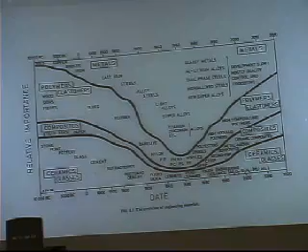Okay. Back here, when people were using wood and skins and fibers and stone, it turns out they actually did have an energy crisis. I'm sure they had several energy crises over the years, but the one I'm thinking of occurred about the mid-16th century in England. And it turns out the crisis started out with two industries.

One was people were starting to make iron, and in order to make iron, they needed a hotter source of carbon, or of fuel, than just wood, so they would burn down the trees and they would make charcoal. Everybody knows how to make charcoal.

You cut down the trees and you stack them up, and then you pile dirt over them, and you put a little hole in this mound of dirt, and you control the amount of oxygen that gets in there, and you essentially ignite it. But in a reduced oxygen environment, the whole thing heats up, and you have a hole at the top, and you basically burn off all the lignin and other stuff in the wood, and you end up with charcoal.

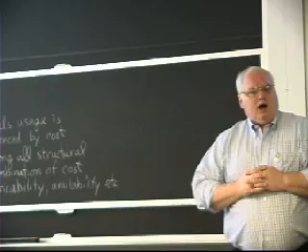And you need charcoal in order to get a hotter fire, because when you have wood, the vapors coming off, all the lignin and these other things, actually cool the fire down to a certain extent. But carbon burns hotter, and so they wanted charcoal. And they were using a lot of wood to make charcoal because iron was coming into greater prominence.

And then another thing was national security. People were building ships. They needed wood to build ships back then. And so it turns out that, as the iron industry grew, this is basically a history of metallurgy called Out of the Fiery Furnace. It's a PBS series. The forests of Britain had long been admired for their most celebrated inhabitants, slow-growing and long-lived. These were the mighty oaks.

And it talks about the iron industry growing, and then the ships. Nelson's flagship at the Battle of Trafalgar took 2,100 tons of oak, thousands of trees, a whole forest, in order to build a ship like the Victory. So the two uses of oak were in conflict. In 1558, a law was passed forbidding the felling of trees to make coals for the burning of iron.

But of course, the government exempted the areas that were important, typical government bureaucracy. You're not allowed to do it except where it's economically viable. And it says perhaps because of the lobbying by the iron industry. In 1559, a writer complained that the price had risen from a penny to 2 shillings. Does anyone know what that ratio is? I don't remember the old British system. I think it's a factor of 14 or something. By reason of the iron mills.

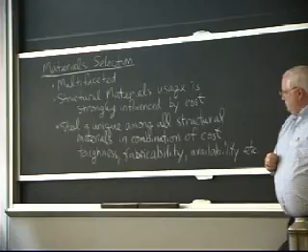And steel is unique among all structural materials in the combination of a number of these: strength, toughness, cost, fabricability, availability, the number of elements in the Earth's crust. The only thing that was above it was aluminum. And we'll start talking a little bit about aluminum today. We started to talk at the very end about the cost of material, or the application.

I didn't tell you that because of this $200 a pound cost over the life of the vehicle, some commercial airlines require that a vice president sign off on anything that goes into the commercial airplanes. You know, like how many magazines you're allowed to carry on board.

Think about it, you've got 50 pounds of magazines. That just cost the company $10,000 over the life of the aircraft at $200 a pound. So you don't always stop to think about it, but I think about it every time I see magazines on the aircraft. I think, whoa.

Anyway, we talked about the X-33 space plane, which was supposed to replace the space shuttle. I think in other parts of the video, when I talk about adhesive bonding, I'll talk about this, but it was towards the end of the day, and I didn't pass this around.

This is a graphite epoxy composite skin and a Nomex or Kevlar honeycomb, and you've got a foam composite between these two sheets, and you've got sheet adhesive in between here.

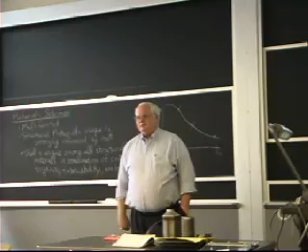Stupidity by objective. Yes? I don't know that there was anything other than some guy decided that's how long it's going to be. Maybe it had to do with congressional appropriation timescales or something, I don't know.

Okay, so that's the X33. It turns out steel is not wonderful for everything. As you go faster and faster, you'd like to have something that's less and less dense. However, sometimes we forget that if something doesn't move, you don't really care about what it weighs, you care about what it costs. However, if it does move, you do care about what it weighs, because the heavier it is, the more energy it takes to move it. And the faster it moves, the more you're willing to pay to get lightweight.

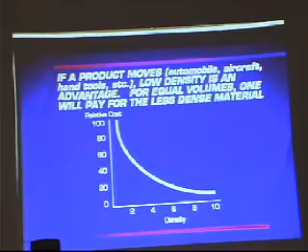So if I went back to that cost of $200 average savings on a commercial airplane, if you look at military aircraft, it turns out they figure about $1,000 a pound, and that's on the average structure. If you actually start talking about the rotor disc, which is spinning at 10,000 RPM, you're willing to pay tens of thousands of dollars to get rid of a pound, because a pound saved there might result in 5 pounds saved on the wing. So if you move faster, with more payload and/or further distance, people will pay a lot.

I remember when, almost 20 years ago, 15 years ago now, I had just come back from Japan, 2 weeks in Japan, and I got a call from Engelhard Company. Engelhard was making catalytic converters — these are catalytic converters, I passed them around last time — for 747s. They were coming out with the 747-400 at Boeing, and this was going to be the long distance 747-400.

In order to take weight out, they didn't want to make... did you know there were a couple of catalytic converters on the 747? It's not for the engines, it's for the air you breathe, because there's ozone up there, and you would get a headache if you were breathing the ozone. So they have to take the air up there and put it through a catalytic converter to get rid of the ozone, so you won't get a headache and you'll meet EPA regs for air quality up there. All the piping had been made in the earlier 747 out of stainless steel. They were now making it out of titanium, and they didn't know how to weld it.

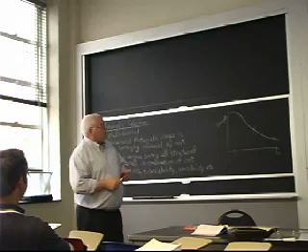Now, in a little more expanded scale in that paper we handed out yesterday, it turns out most material scientists will tell you how wonderful the material is and how the cost of the material is such an important part of the whole thing. Turns out it's not. And that's why this is a welding joining fabrication course. Because the cost of the material, typically for most manufactured products we're interested in, is only about 10% of the total cost of the product you're going to sell.

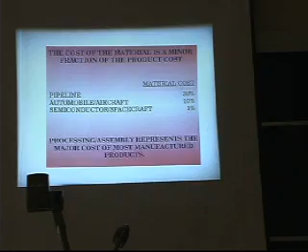You got about 10% of your cost will be design, about 10% will be materials, about 10 or 20% will be fabrication, about 10 or 20% will be non-destructive evaluation of the material, testing, quality control. Hopefully you got 10% profit. Anyway, the numbers are in a little table. The expanded numbers are in a little table that I put together in there.

The one application that I know uses more material as a fraction of the final completed product than anything else is pipeline. And the cost of the pipe is about 30% of the cost of the pipeline. Although you could argue that I should have started with the cost of the plate rather than the cost of the pipe, in which case that number would come down a lot closer to 10%. Okay? Because the pipe costs close to 3 times as much as the steel plate. One of the reasons is because when you ship pipe, you're shipping air. So it costs a lot more to transport pipe aside from just the manufacturing cost.

And in fact, I learned a number of years ago, it actually ended up becoming an LFM project. It started out as a consulting project, but we ended up selling this company, Reading Tube. It's a copper tube extrusion plant. It had a couple of LFM theses done there. And it turns out the United States still has 5 producers of copper pipe.

And the reason is, copper pipe's not like steel. Steel, they load on ships and they transport it around the world. Copper is more valuable than steel, so you'd say, well, gee, how come it's not traded as a commodity? Well, it turns out copper pipe has got a lot of air. And so you can't transport it as efficiently as you can big blocks and big plates and sheets of steel that are all rolled up. Pipe, by its nature, is 80–90% air. And it turns out the transportation costs are the things that control that selection of material.

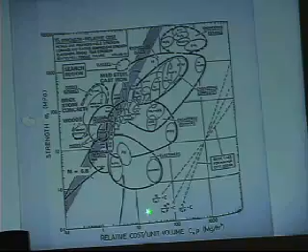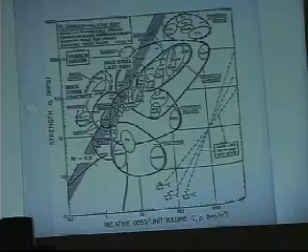Let's take a little bit more time looking at Ashby's types of plots. If you're taking a very high-level view, these are very, very useful plots. Ashby actually goes through some engineering mechanics formulas and says these are guidelines for minimum cost design, and he says basically strength divided by density, but the strength in some cases should be to the 1/2 power or the 1/3 power depending on the shape, the geometry, or the application. And he goes through whether you're using them in sheets or in a bulk material or whatever.

And so you can kind of overlay on this thing. You can look at different regions depending on these slopes when comparing materials. For example, if you're on this steepest line, something here, silicon carbide, you come down that line and say, well, silicones may not have the strength, but on a relative cost, they have the same quality, or actually attribute, J or whatever Professor Clark calls it.

Yes, so ceramics are the hardest, strongest materials, but they're brittle. Metals are used widely in structural materials because they're not brittle, which is another dimension, toughness, which isn't on here. But they have high strength at a fair cost compared to these things. However, if you look at these lines, there's a lot of trade-offs on all these materials. We use plastics for structural materials. This is cost per unit volume, so the plastics have done a little better because they're light, even though they're weaker on an absolute scale. For a structural material, you usually are looking at cost per unit volume.

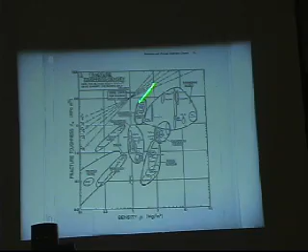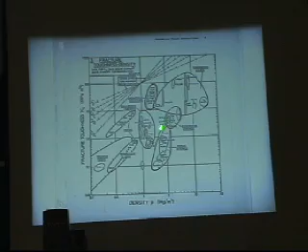I did find my toughness plot, which I got the wrong one yesterday. There's lots of different criteria on these slopes over here. The engineering alloys, these are the metals. Is that tungsten alloy? Anyway, tungsten carbide, cobalt, aluminum alloys, titanium alloys, cast irons. Down here, your polymer foams are very, very light, but don't have such great toughness. But if you're talking about ultimate toughness, the engineering alloys, the metals, are way out here, way above anything else. Metals have ductility; they stretch before they break.

And it turns out people can come in and talk about other wonderful things, but they just can't compare. And this is the one I put up before. This is modulus, stiffness. Sometimes stiffness becomes the criteria.

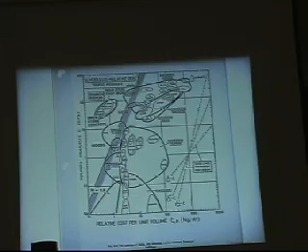For example, as you're doing microsurgery. When I was younger than you, I tore the cartilage in my knee. And at that time, to fix the cartilage in your knee, which I never had done, it was like 6 months on crutches afterwards because they had to lay open your whole knee. Nowadays, they just put a little slit in there and they go in with these little micro tools and fiber optics and stuff, and little rongeurs that can eat out the cartilage and flow it out of there.

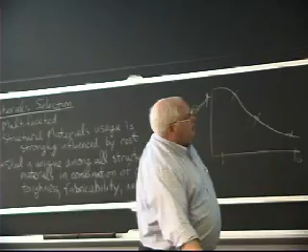But it turns out as you do that, you get slenderer and slenderer instruments, and they get a little too flexible. I actually used to work with a division of Johnson & Johnson, and they wanted to know: our instruments, we can design them smaller, but they're too flimsy for this application. What do we do? Well, they were already using steel, and it turns out steel has got about a 30 million modulus. It's right up in here somewhere. Can't read it on this thing.

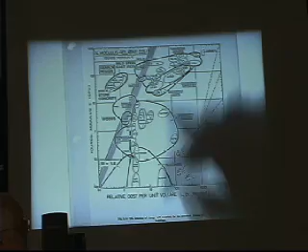Steels. Okay, there's steels right there. It's way up near the top. It has relatively low cost, but it's right up near the top. There's not a whole lot of things above it. Aluminum oxide, silicon carbide, diamond, molybdenum alloys. It says tungsten alloys right there, but molybdenum's up there a little bit above it too. There's very few things that have a higher Young's modulus, which is what you need for a bending beam.

However, I did recommend to them that they consider using sapphire, which is single crystal aluminum oxide, because you could add dopants to it, things like chromium, and you can make it red, so it can be color-coded. Physicians like color-coded instruments. It has excellent corrosion resistance. And it turns out single crystal sapphire is now down around a few bucks a pound.

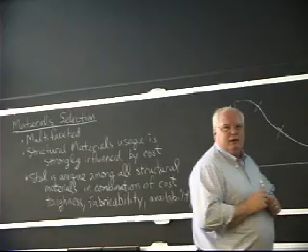Now, it's a little hard to machine, because it's second hardest to diamond. You can only machine it with diamond tools. But I actually thought we could design little cutting tools, and they're hard, but they never liked that idea. But it is stiff. You could have designed smaller tools.

And if you did add chromium, the sapphire is no longer sapphire, it's something called ruby. And can you imagine going to an MD and selling him: you can either buy the sapphire instrument or the ruby instrument. And MDs, they buy anything. Anyway.

Specific strength. If we start looking at strength divided by density, it turns out aluminum is better than steel. That's one of the reasons for using it in many applications. If you think of an aircraft, it's made out of aluminum. There's a good reason for it. It's got better specific strength. You can afford to pay more than $2 a pound for the aircraft.

Simple composites, and I mean things like fiberglass. I'm not talking some aerospace composite. Let's just say simple composites. Plastics really kind of bite the dust. They're not very good on strength-to-weight ratio. They are good when you really don't need a lot of strength. They're great. And wood is not as good as some of these other things. So there's lots of different criteria you can use, and you have to figure out which one for which specific application.

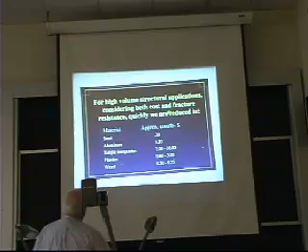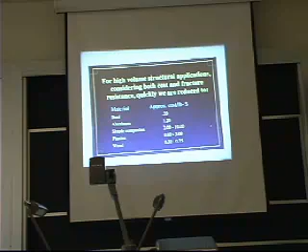Anyway, if you consider high volume applications, you got to worry about cost. And here is strength to weight, so approximate cost per pound per dollar. So steel has a 6-fold advantage over aluminum. So if I'm building a bridge that doesn't move, steel. Okay? If I'm building an aircraft, hey, I can afford aluminum because it's $200 a pound and $1.20 doesn't bother me at all. So there's lots of different criteria, and people come up with these different figures of merit.

Now, the next part of the talk, which I don't know if I need to go through, but since we got a lot of LFM students here. Sorry. What about comparing just steel and aluminum? Not just durability, but fatigue characteristics? Doesn't that really play a big role in what you design to? Yeah, it does, but steel actually has better fatigue characteristics than aluminum. However, clever mechanical and geometric design, or inspection, can solve those things.

If you can get a better performance, and I don't want to build steel aircraft, although you actually can. If you wanted to build a little home-built aircraft with a small 4-cylinder engine that's going to go 125 miles an hour, so you can go up in the air on nice days, typically they make that out of a steel space frame structure. It's just steel tubing. It's easy to weld. It's relatively light when you make a space frame structure. And then you cover it with fabric, typically. This is not all that different than what they built in the 1920s.

And in that case, the steel actually has better fatigue resistance, and all you have to do is keep it from corroding. Aluminum, if you're going to pay for lots of gas, and jet fuel is the big driver for the commercial airlines right now, you want something that's as fuel efficient as possible, and so you're willing to spend the time with good mechanics doing the inspections on the aluminum to find the cracks. So yeah, aluminum will crack more readily than steel, but it's something we've learned to solve by inspection. It's a maintenance cost down the road.

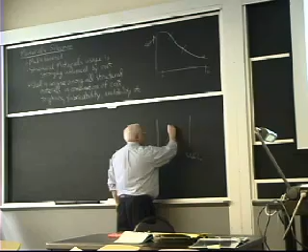Okay, so CPK is a simple number. If you have a lower control limit and an upper control limit, you'd like to have a Gaussian distribution of your process variation where virtually everything falls between your process limits. Okay, you don't want something where this is scrap and this is scrap.

Okay, so CPK is a measure, a mathematical measure of the width of the Gaussian to the width of the process limits. And at Ford, it's got to be like 2.7. I mean, if you're going to sell something to Ford, you have to tell them what your CPK is of making that switch. Okay? And if you're below a certain level, you could be cut off. Okay? That's the way business worked in the early 90s.

But the engineering faculty at the universities were clueless. Absolutely clueless. Okay? But since we're on that, since I like to do asides. So it turns out in the early 90s, the CEOs of AT&T and Kodak and IBM and Boeing, lots of big companies got together and said, we've embraced total quality management, and we know what it is. No one at the universities understands this.

And so we are going to offer up our in-house training facilities to take 50 faculty from actually selected universities, not any university, Stanford, MIT, University of Illinois, I don't remember all the universities involved, but MIT was one of them. And we will give you our full course on TQM so that you can go back and teach the students.